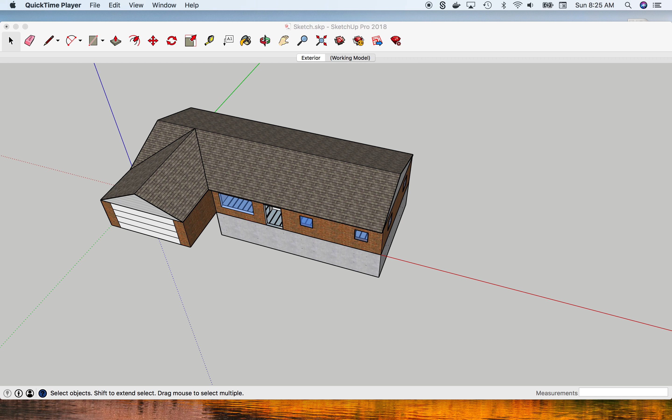This is recording number 3 on the SketchUp house, doing a duct design. The only thing I've done since the last video is add the interior doorways, which didn't take long. I saved you guys the pain of watching that. It's pretty easy, so we'll get started on the duct design.

What I like to do is use a section cut, where I can cut away part of the model but still see where doors and everything work, giving me a little more room inside the home to start placing registers.

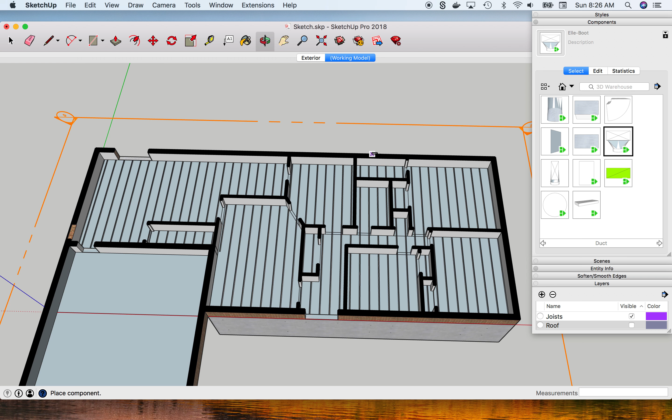I have some registers and boots made up already that we'll use, and we just go around and set them where I think they'll be needed. So we'll start over here by the kitchen. I like to set my registers normally about 6 inches off the wall, so we'll make a line so they're all lined up.

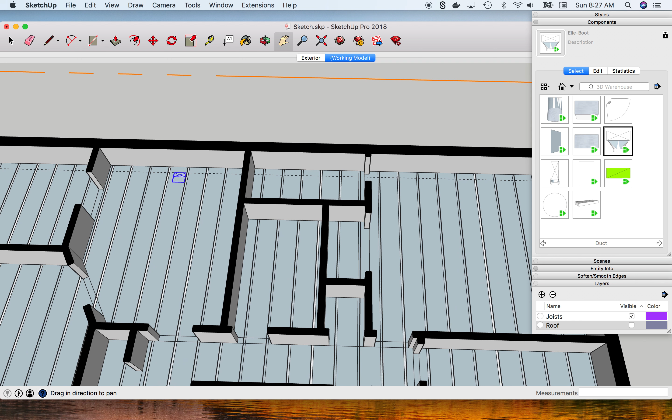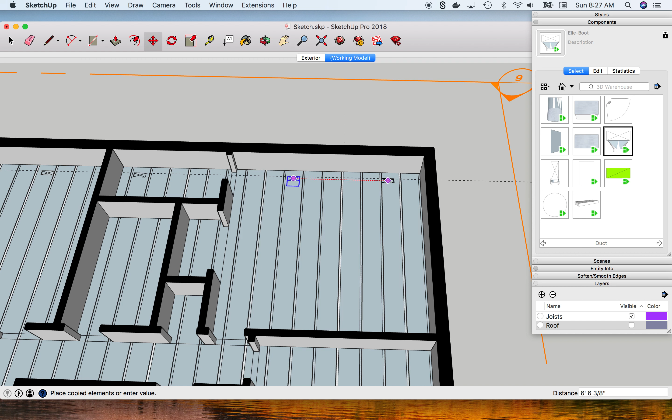Just start copying them around on the exterior walls. Now we can do the other exterior wall. Add another tape measure line, 6 inches, so we can keep them all in line.

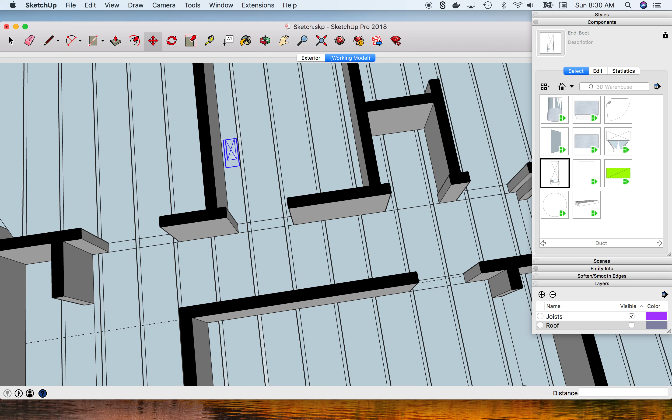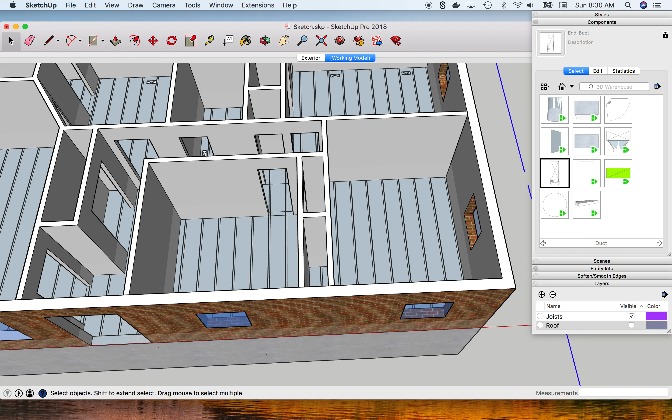We'll delete out all our tape guides, and we can add where the returns will be. To do that, I just turn this section cut off so I can see the walls, and we can start placing our return grilles where they're going to go. Return grilles I normally keep 8 inches off the ceiling.

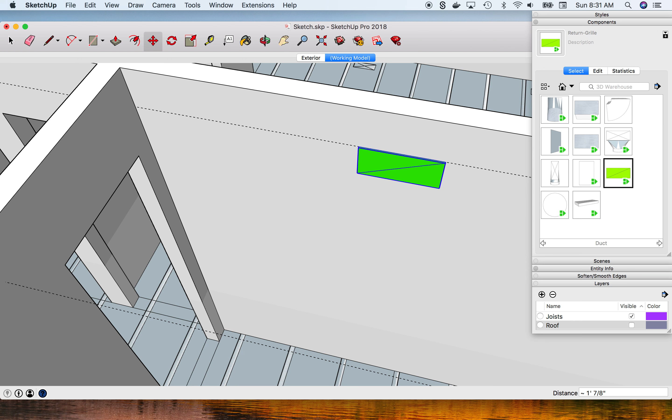So there's one bedroom. We'll do the other bedroom and master bedroom next. I like to get them to line up with the joists below.

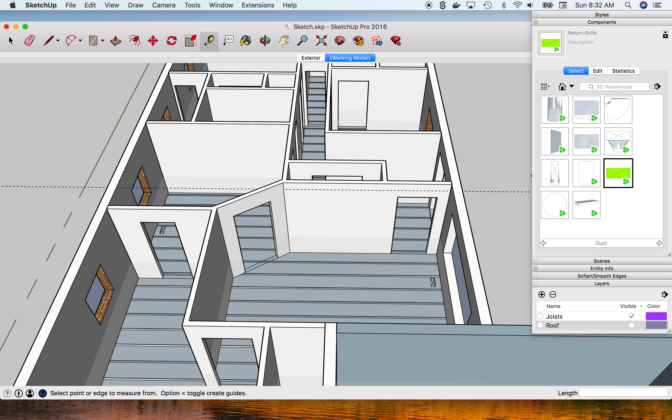Now I will add the return for the main part of the house in the formal dining room here. This one will be a double wide.

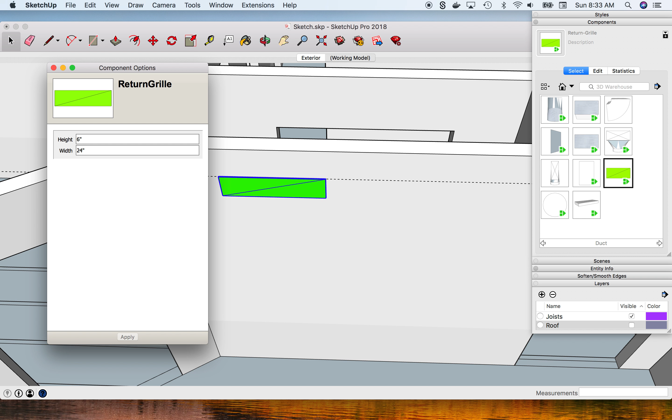So what I can do with it is I actually have some options I can set. My standard is a 12 by 6. I'll make this a double wide, 24 by 6, and you can see it just automatically makes the grill larger for me.

I'm also adding one in the family room over here. I don't like that it's so close to the kitchen, but I feel like this is where people will spend a lot of time, so I want to have a return over here.

And once again, we'll get it to line up with the floor joists.

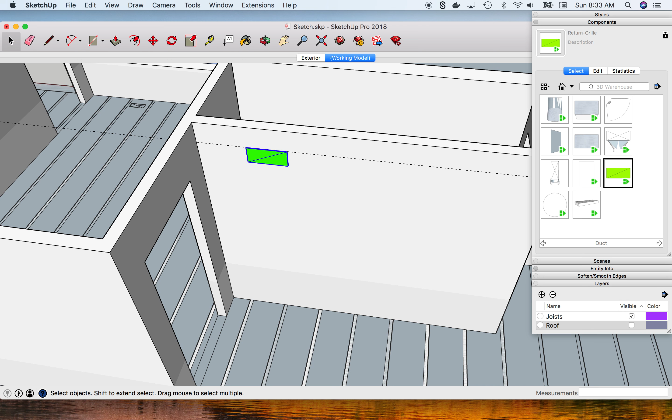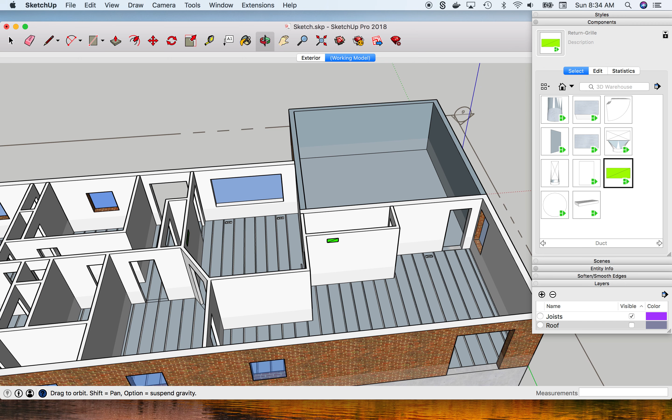Alright, so that's it for placing the registers and grills. We'll delete the guides out, and at this time I just like to check and make sure that everything's in its own joist bay and not in line.

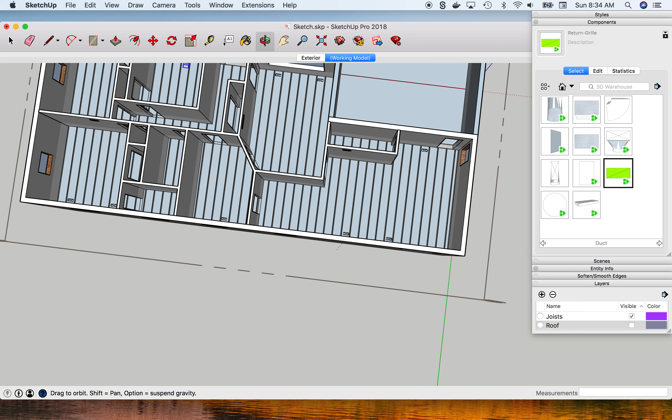So right here, this one's in line with this return, so I need to move it over closer to the center of the window anyways. I'm actually going to move this register down more too, for better separation for the room.

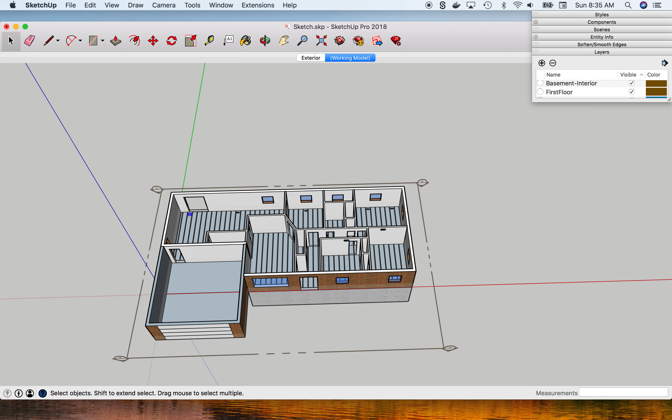That should be about it. So now we can turn off our first floor and the first floor walls, and that gives us a little layout here of where our registers and our returns are going.

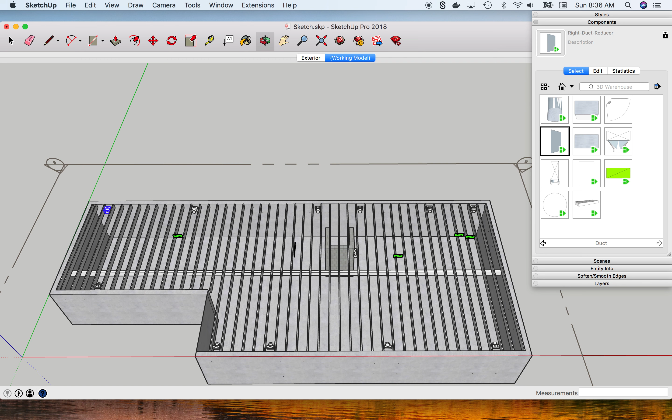So at this point I add some panning where my returns are down below. That just gives me an idea of where my ductwork needs to go. So let me open up where... panning, there we go.

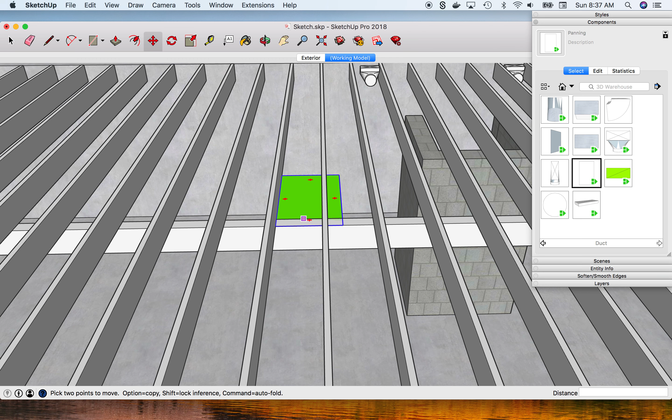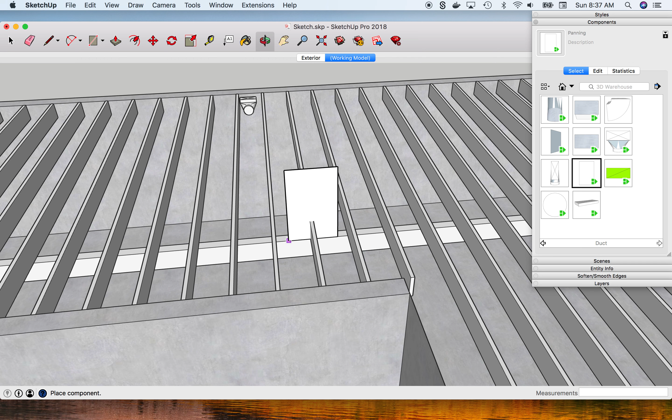I color my returns green here just because it makes it a little bit easier to view and where they're going to be.

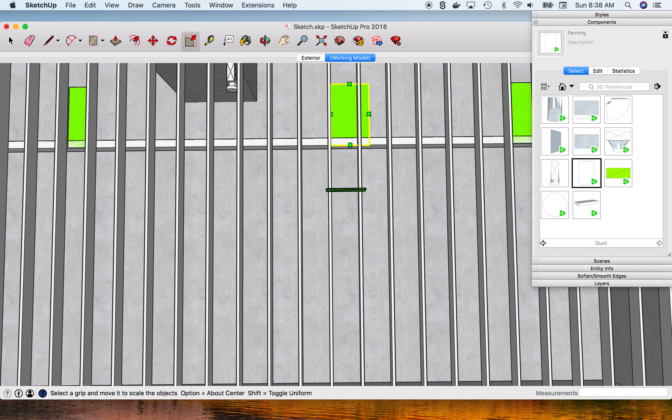Just making sure that they're over top of where they need to be. So that looks pretty good.

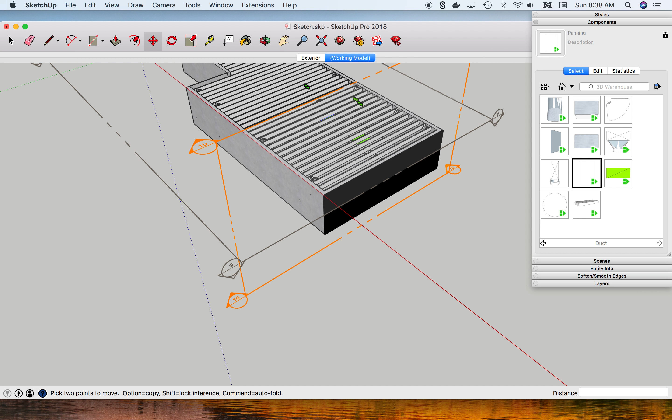So at this point I use another section cut to move away part of the basement wall, so I can get in here and start adding my equipment.

I did also add a little shower here in the basement, which our air handler and equipment's going to sit right next to.

So we'll first start with a little return box for our unit to sit on.

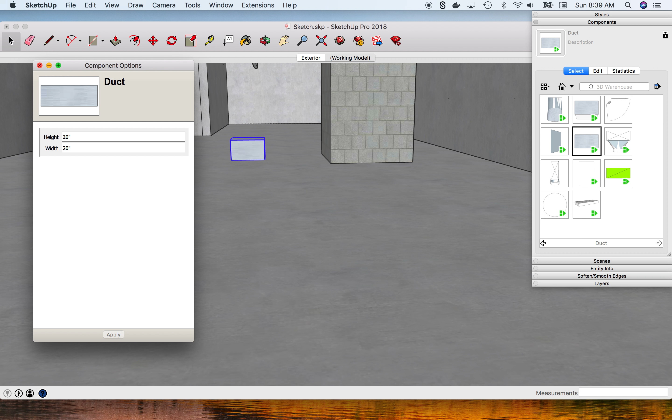Make this the right size, so I'm going to make this a 20 by 20 box, and we'll make it 20 inches tall.

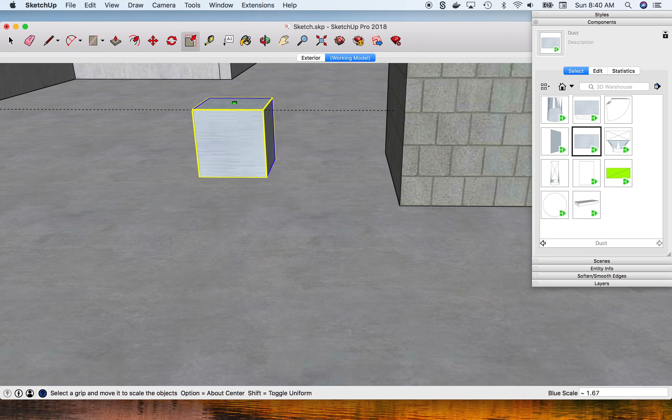Now I can go and open up where my equipment is that I already have pre-made. So grab an air handler.

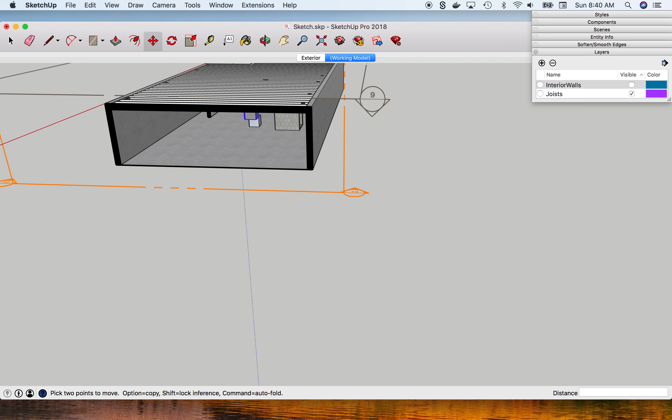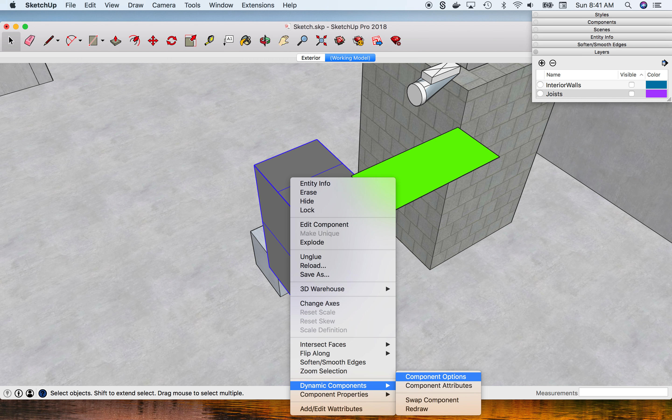Then I've got to turn it and set it the right way, and also edit its dimensions here. So my air handler is 21 and a half by 44 by 17 and a half wide.

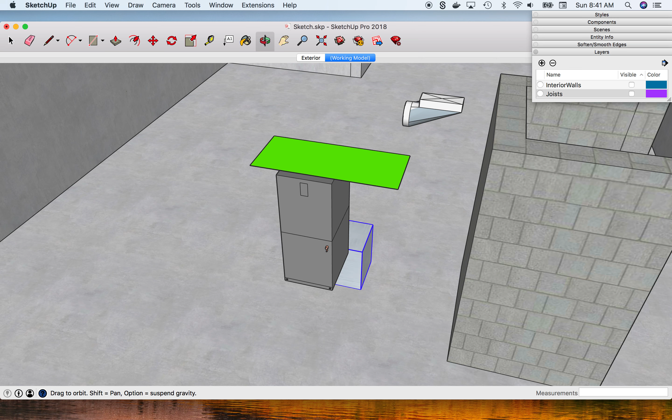And that means I have to adjust my return box, I forgot, to be 17 and a half wide. And I also need to rotate it so it's the right way.

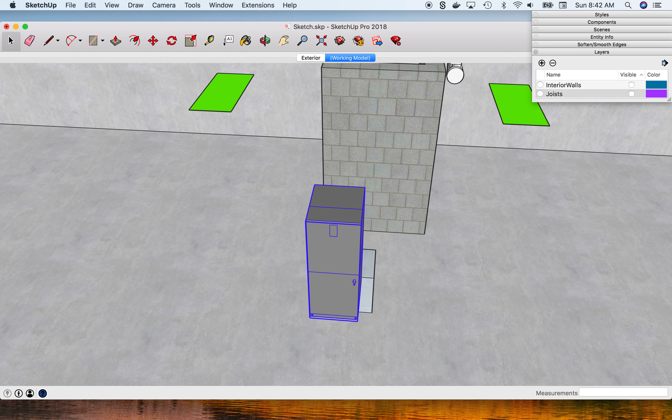Okay, there we go. Make these two things a group so I can move them about easily, and just line it up with the wall. Next I'll add my return 90.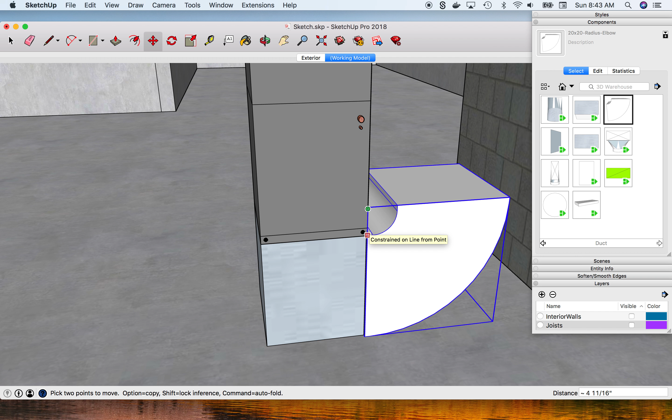Put the metal pattern on it so it matches everything, and make sure it lines up in the back as well. I need to make my return box a little bit bigger.

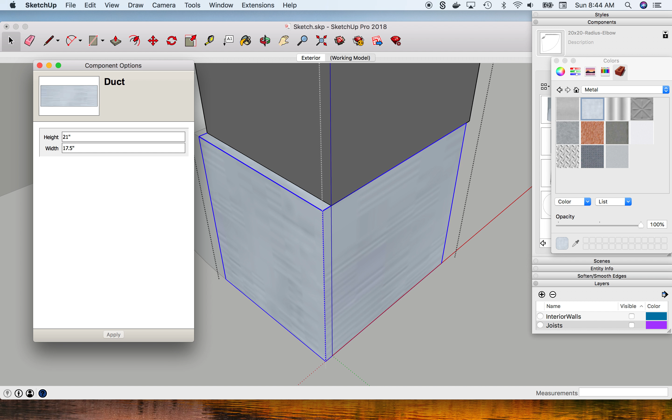Okay, next we can add our duct plenums in. Oh, I forgot I need to add my filter, my media filter cabinet, in as well on the return first.

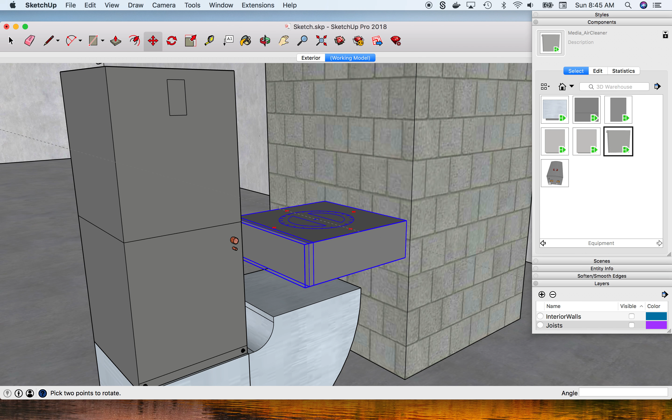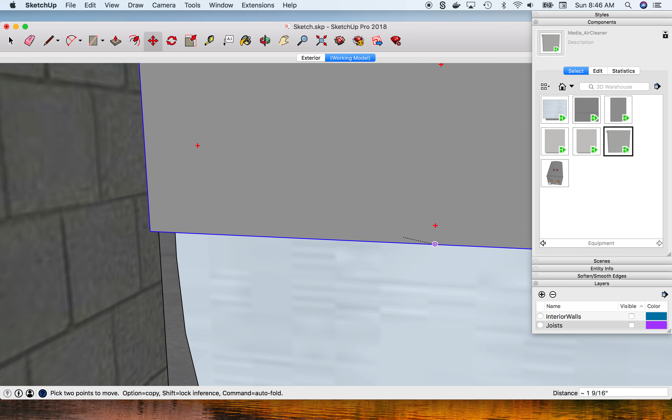Get it all pointing the right direction here, get it centered. Now we can add our duct plenums.

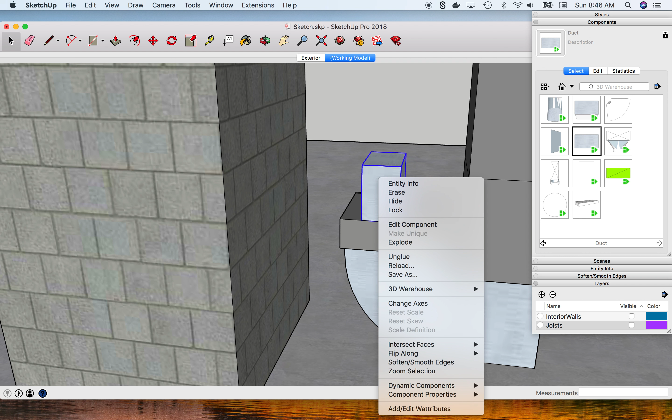Add a section of duct and set it to the right dimensions, so this will be 20 by 20. Center it up. Then at this point we can change the height to the correct height, so I need to get back around here to my little section cut.

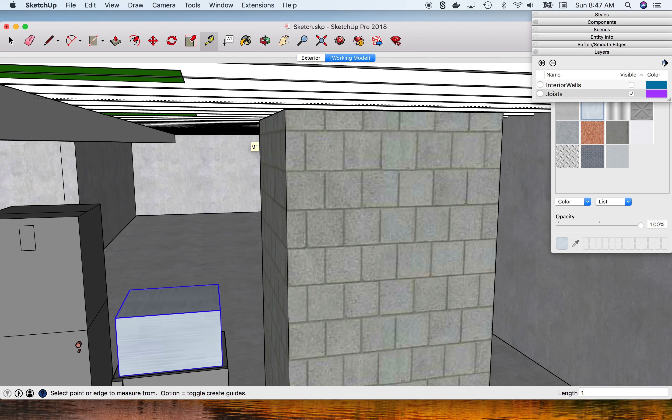I want to make a little tape mark 1 inch below the joist to keep it off the joist a little bit. So then I'll just take it up to my tape mark and that'll be my height.

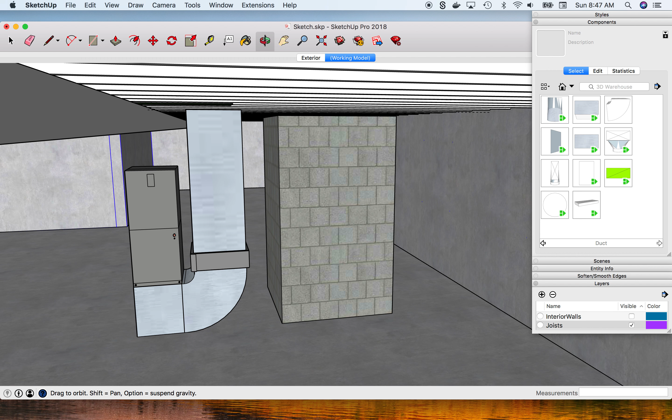I can do the same thing here on the supply of the air handler, so I'll go to my components and grab another piece of duct. This one's going to be 14 by 20, so just adjust that.

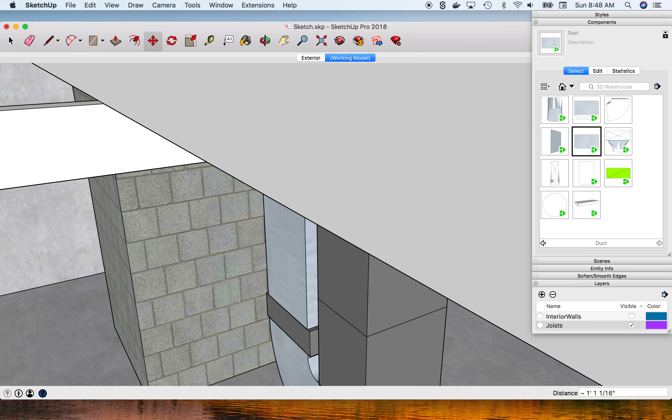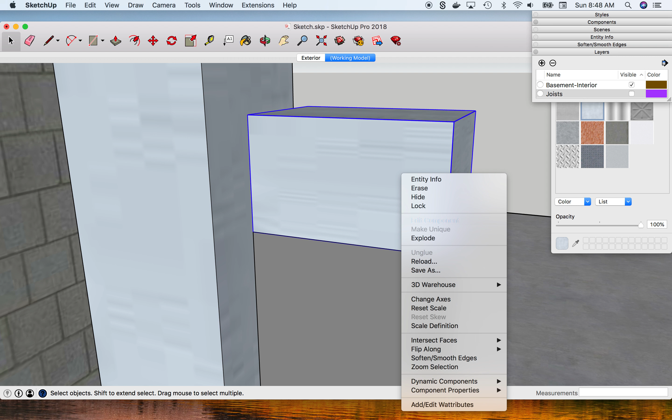14 by 17.5 is what that one is. And then we can set it to the same height as our return drop, which is 1 inch off the ceiling.

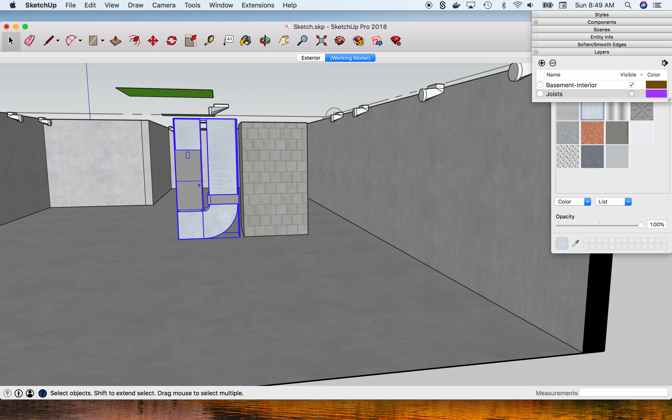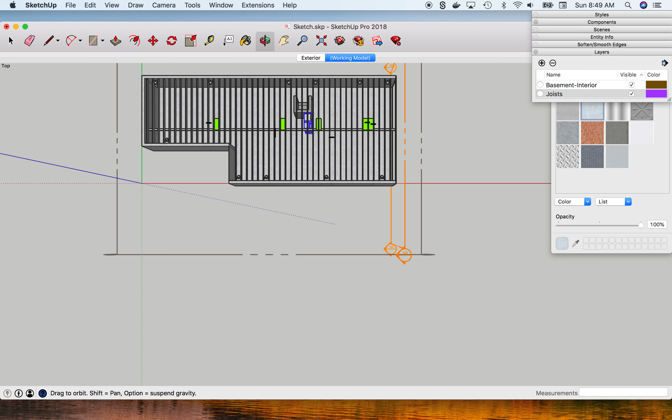So then at this point, go through and make a group out of all this so I can move it a little closer to the fireplace or the shower, and make sure that I'm out of the way of our joists here and our beam. All right, so that all looks good. At this point I can start adding my supply and return takeoffs.

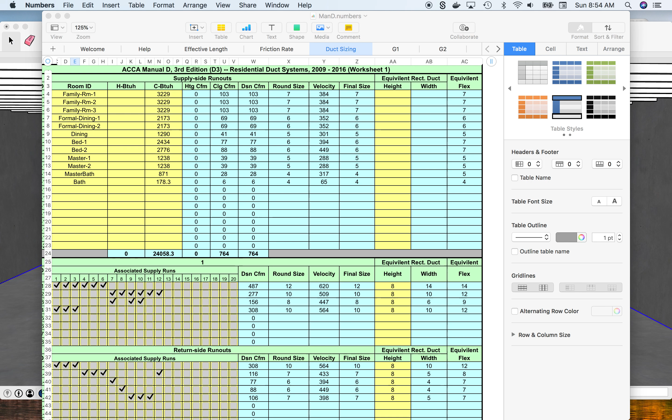Okay, I had to get the Manual D open that I've got, so this shows my duct sizing, and the side I'm working on now are these 7 through 12 registers, which shows I need a 10 by 8 piece of duct.

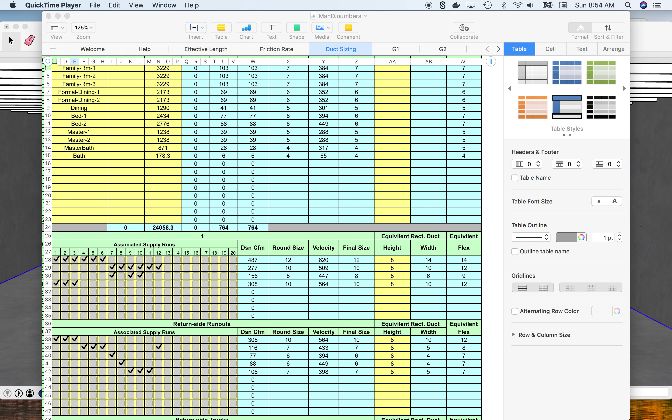So I'll adjust my takeoff to the right size before I open it or place it correctly. That's a 10 by 8 riser takeoff, which I'll then shut off the joists so that I'm able to set this in place correctly.

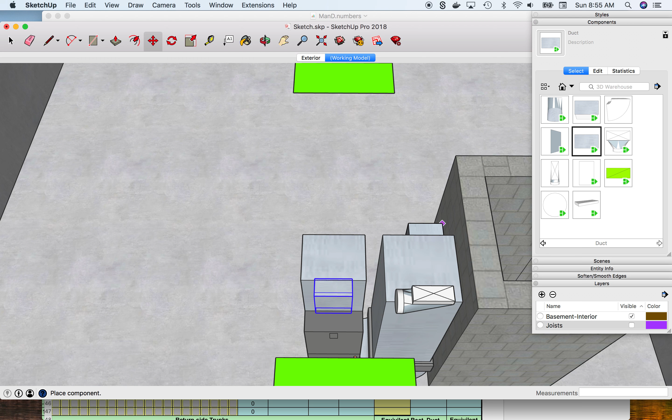I can then add a piece of duct, change it to a 10 by 8 duct.

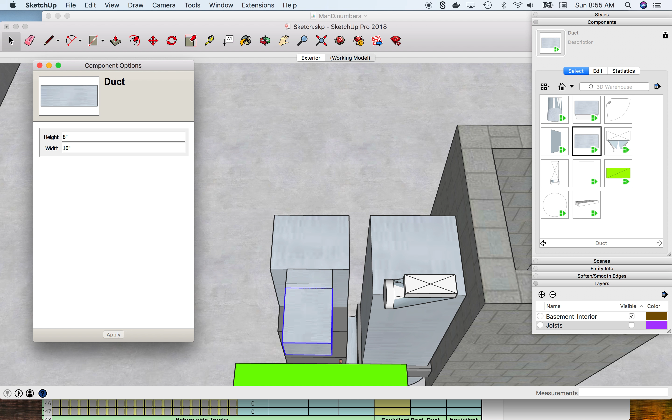So then I'm going about 3 registers out that'll come off of that, and then I switch to an 8 by 8 duct. So add another section of duct and set it to the correct size.

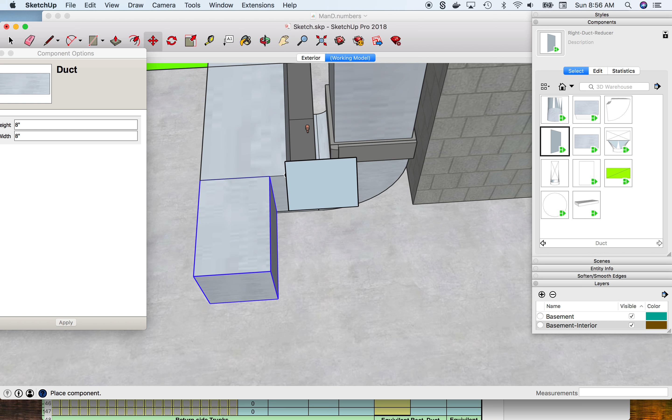Now I can add a duct reducer. The reason I have all these components set out, and sometimes this duct reducer is a little tricky to get to go to the right place, is that's a 2-inch reducer - it's because I'm getting this to print out a bill of materials too, so it's important to use each component separately.

There we go. Then I can just scale this one out to my furthest register, plus a little bit for room. And that's the supply duct side.

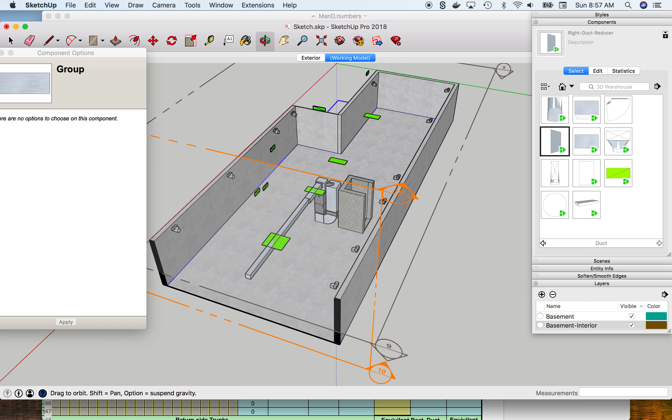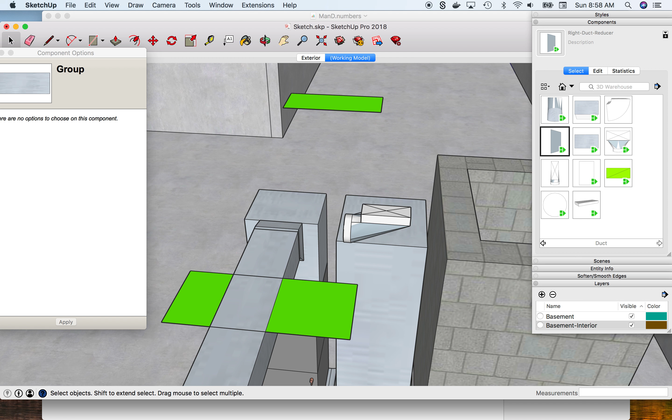Next, while we're over here, we'll do the return plenum for that side. So let me get back over here, and that is also going to be a 10 by 8 takeoff. So I can just copy this riser takeoff and move it over to there.

Can also copy this section of 10 by 8 duct, and this one I'll just keep 10 by 8 all the way down. So I'll just come to my furthest return. Now I can move this section over to here.

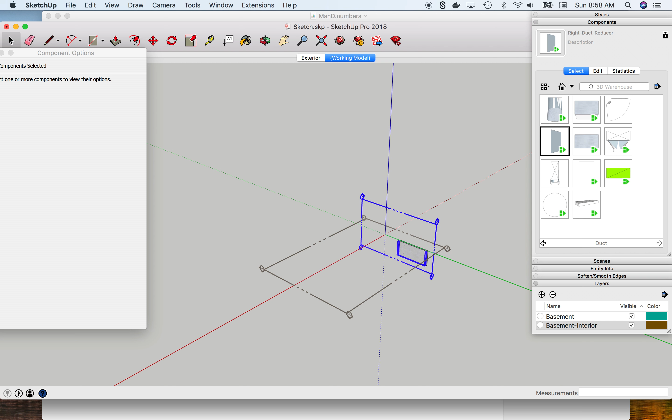Do what's called a reverse cut, and I'll be able to get into this side to start doing my duct. So actually I'm going to move this up past this bump out to make it a little bit easier to get in and add my duct takeoffs.

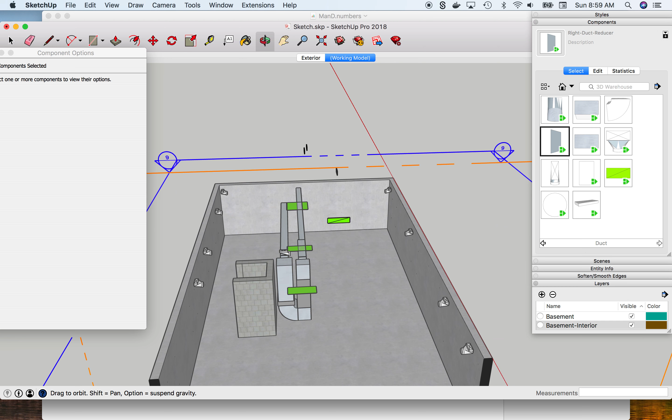So now on this side, run out, we're 14 by 8 duct. So get a riser takeoff, set it to 14 inches wide, and then I can go in and set it in place.

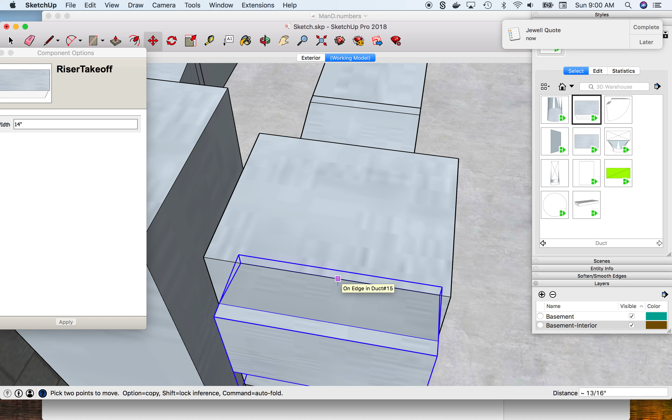Then we'll add a piece of duct, which is already 14 by 8. It also goes down to 3 ducts and then reduces again to 10 by 8.

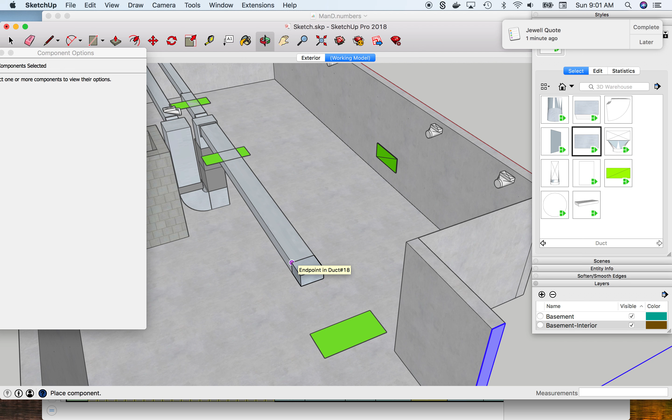So at this point, I need to move my section cut a little bit again, and I can go ahead and add my 10 by 8 duct with the duct reducer. So we'll make this one 10 inches wide. We want our reducer to go on this other side, so a 4-inch reducer.

Okay, and then that duct continues on to essentially the end of the house.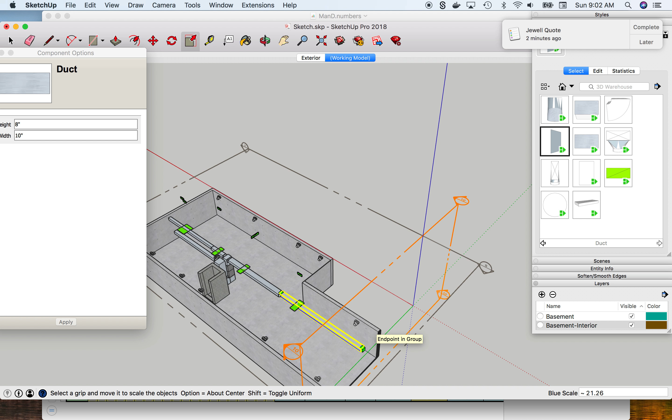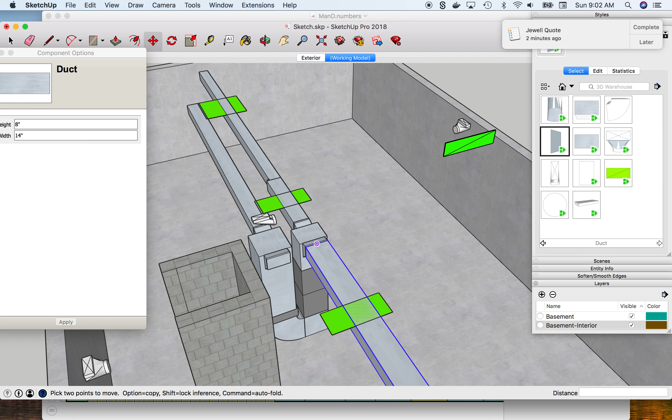Now we can do the same with our return here. Copy this riser takeoff over, and this piece of duct over. Scale this back to this return, and that's where this one reduces.

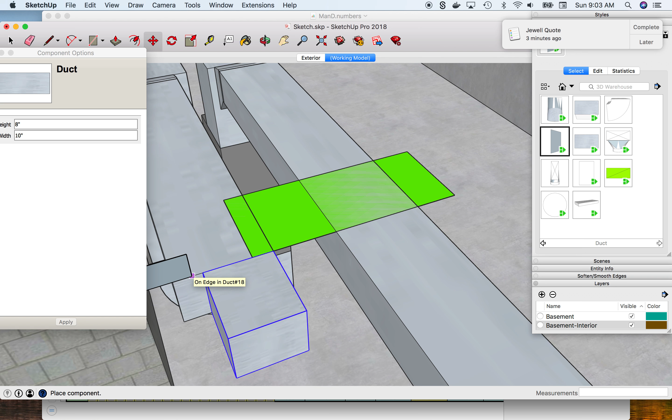And so we reduce to 10 by 8, it looks like. So set the size of this piece of duct, and make a 4-inch duct reducer.

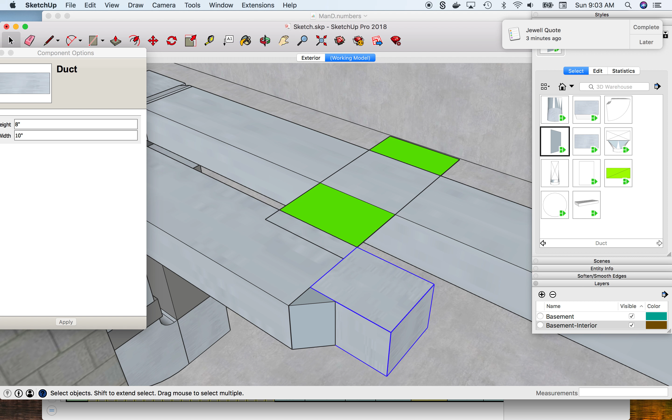Then scale this one down to my last return. So that's the gist of the main duct layout.

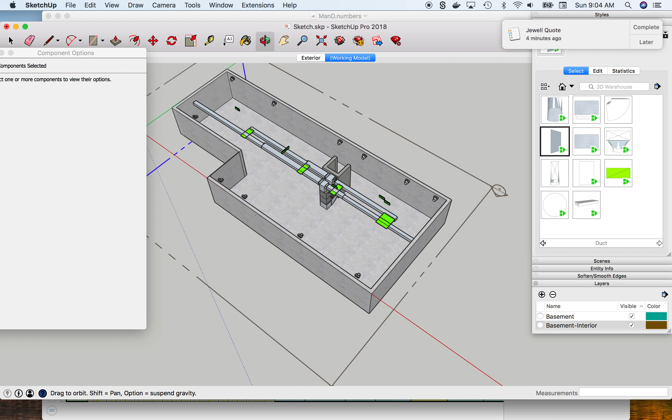Turn all these section cuts off and let you guys see. So that's pretty much it at this point. I'll leave it there, and the next one will show doing all the runouts.